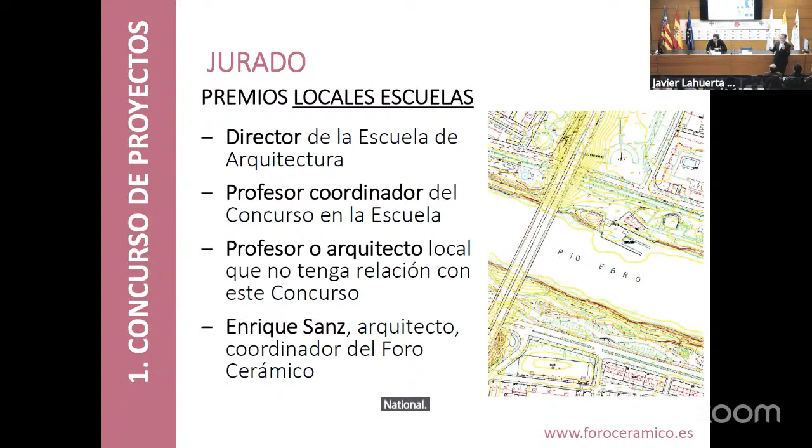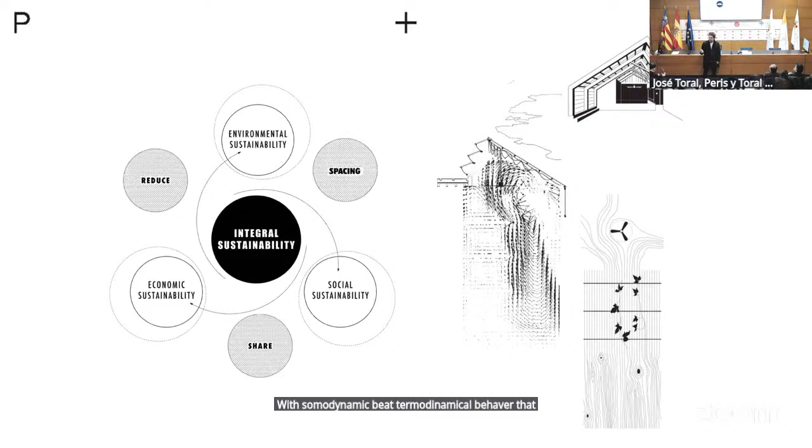So what we do in the office is, instead of aiming directly at the environmental, only at the social or only at the economic, we try to do strategies that are somehow in between. Whenever we want to be environmental and social at the same time, we use the strategy of spacing. We create some intermediate spaces with a thermodynamical behavior that helps reduce the energy demand of the building, but at the same time we place them in the circulation parts of the building, in the shaded parts of the housing, in order to have some social benefit.

And whenever we want to be environmental and economic, the strategy we use is reducing. From the 3 R's, the first R is reduce. That means we have to be able to do the same with the least amount of material necessary. So we reduce the number of layers, we reduce the amount of materials. Remember the Norman Foster documentary, how much does your building weigh, that Mr. Fuller was asking him? Because the less something weighs, the less it contaminates. So we try in every sense to simplify all the solutions in order to reduce them as much as possible. By doing this, it's much more environmentally sustainable, but also much more economic.

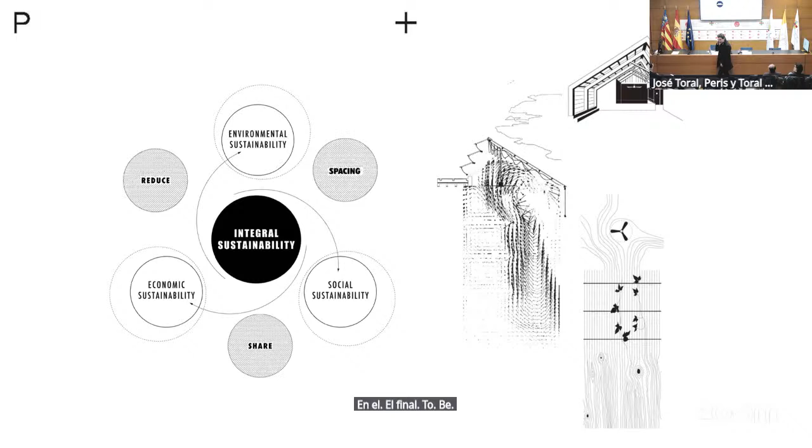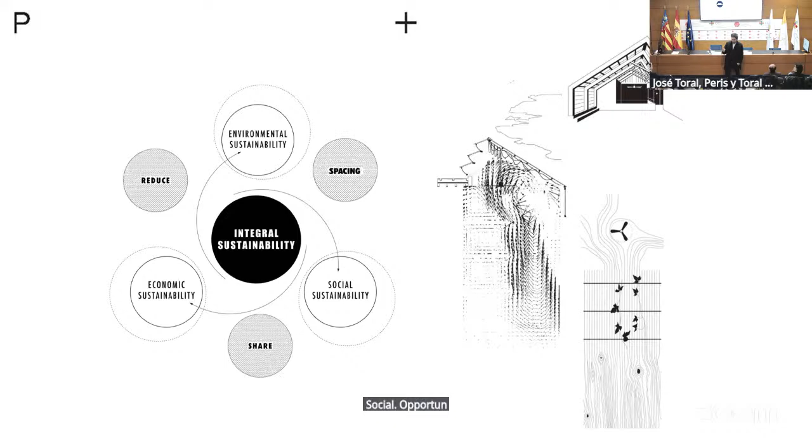And finally, whenever we want to be economic and social, the strategy we use is the idea of sharing. Every time we share, we don't need to repeat the solution, so we only need to do it once, and everybody is able to take advantage. So it's more economic, but at the same time we give a social opportunity. So we will talk about our projects, but the important thing I want you to understand are the strategies; the project is only a way to understand the strategies.

So we will begin with this project. All of the projects are social housing. They all go through competitions. And we took the projects that we are doing in the office with some kinds of bricks. So this is a building we did in Ibiza. This is Ibiza, the downtown is over there on the left. But we're here in Playa d'en Bossa.

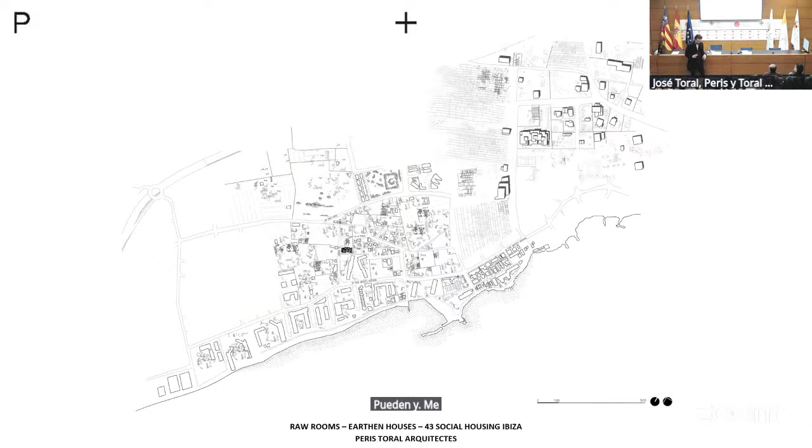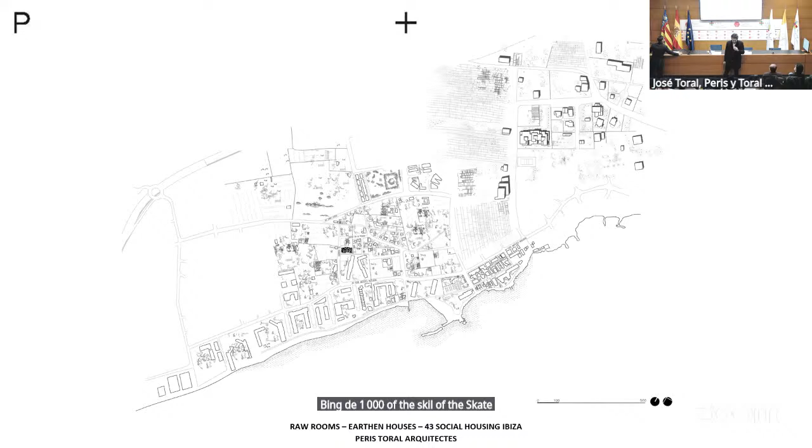It's an area where we have many big-scale hotels. It's also very close to the airport, which means the planes go very close to the hotels. It's very noisy, and that's why they have become discotheques, like Ushuaia, some of them very famous, because they make noise to compensate for the noise of the planes. And we are placed just behind there, in the middle of small housing. So we wanted to be in the middle, using the scale of the single homes and at the same time getting the scale of the big buildings.

And by doing this, also facing all the dwellings to the south, and also taking advantage of facing the embat, the wind that is coming from the sea to the inland.

And this is a diagram that we did in the competition, but we like to show this diagram because we don't see an object, we see a process. No, we understand the system, so we're talking about a system. We don't see the limits of the drawing because we are talking about a concept, not about an object. So we don't design an object, we design a concept that is related to this idea of the raw rooms.

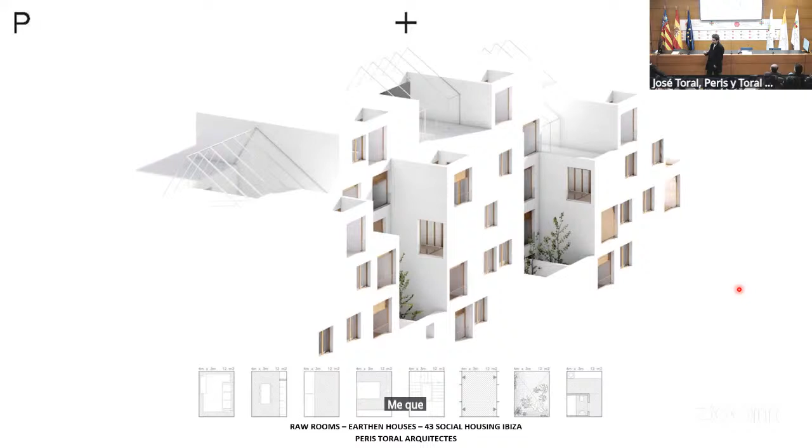So in some way, we understand that in the 21st century, it is important that we don't have the hegemony of the living room anymore, because the television is not anymore the center of the house. Because the relation with the media is more an individual relation with our devices, and privacy is more the relation with our device than our individual room. And that's why, in some way, we have decided that maybe a solution is making bigger rooms and making buildings with equal rooms. So this is a 3x4 room. This is the model we're using.

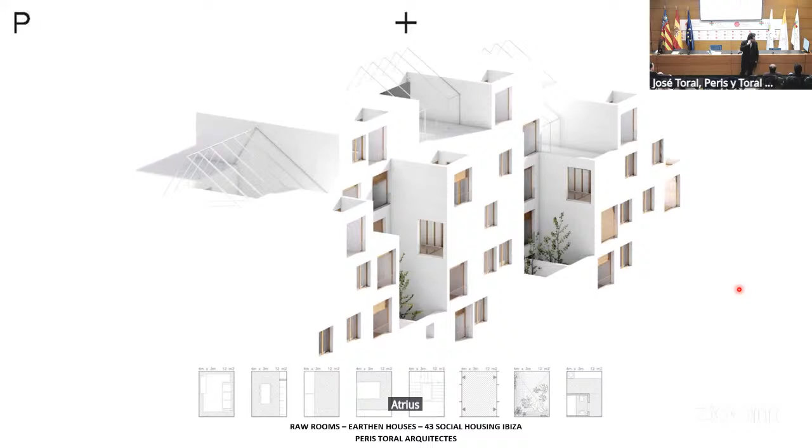And the strategy here is, because of the regulation also, we needed to have some step backs when we are going up, for some very boring regulations. So we take these measurements, and what we do is shape the volume in order to generate more vertices. And every time you do a vertex, that generates a vortex and increases the movement of the air. And also you can see that we are covering the patios with some atriums that will have some environmental behavior.

And this is the plan, so we have 3 cores. Every core has a stair, then the lift, and then we have a room, and then the patio. So we repeat this 3 times. We're able to enter up to 4 dwellings per plan, all of them with cross ventilation, because they're facing two facades, or because they have the cross ventilation through the patio. So we work with this idea of the equal rooms houses with no corridors.

When we go closer, you can understand some ideas, some structural ideas, some bearing walls. Here we understand this relation of the stair, the lift, this room is the same that we see here. Then we have a lattice, a ceramic lattice that gives some privacy to the windows of the inner dwelling. So in some way lattices, privacy, and the movement of the air are going to be very important in this project.

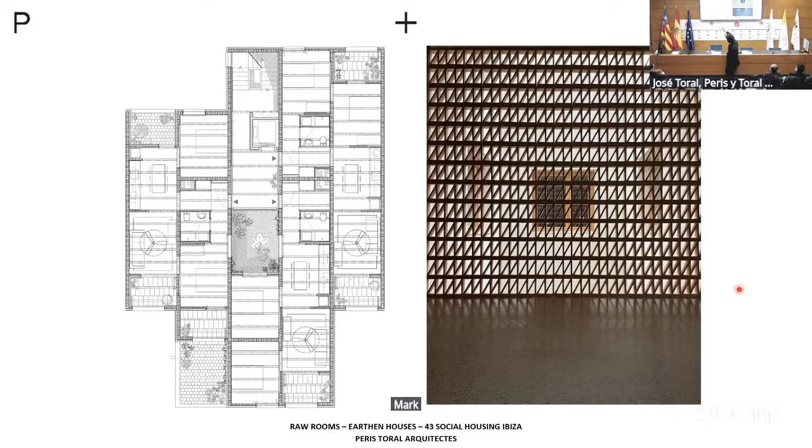And here you can understand also that the relation that we have to the exterior is through these intermediate spaces that, when they are facing south, are closed with glass curtains and work as winter gardens. And the ones that we have in the north are acting as a thermal buffer. So the relation of the interior to the exterior will be through intermediate spaces. So we can see here all this materiality and all this idea of the enfilades of rooms.

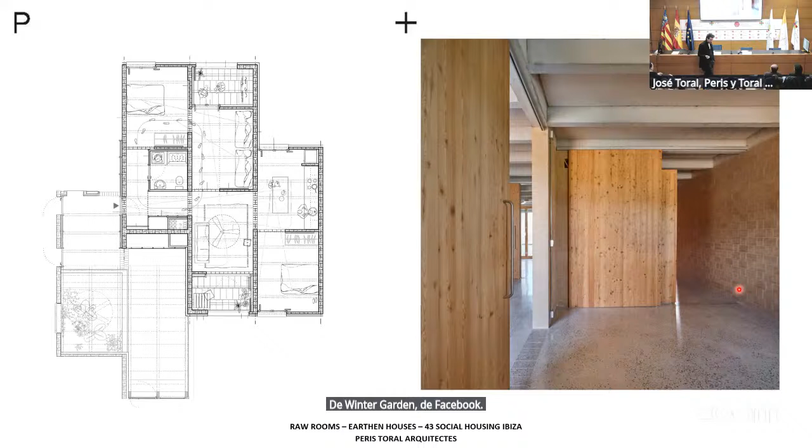And if we go closer to one of the units, we can see here this unit that we're talking about: 6 modules, and 2 half modules that are the relation between the thermal buffer and the winter garden. The first one is the entry. The entry is the one with water. So we have the bathroom, we have the washing machine, and we understand it as furniture. So we understand all of this as furniture inside a room. So that's why it's a lower level.

Then it is important that the bedrooms have 2 doors in order to have a double circulation, so we can decide how to move through the house, and we can have some relation of the inner space from one to another. And also from the living room, we have all these diagonal relations between the kitchen, the living room and the bedroom, and again it's a house with no corridor, so all the surface of the corridor is put into the bedrooms, to make all spaces equal. And also this relation with the winter garden. This is the winter garden in the summer situation.

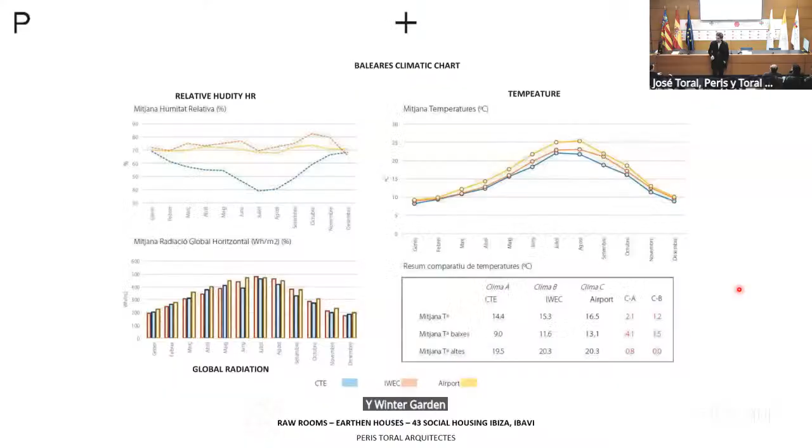But the real site plan will be this climatic chart. So to understand it, these are the mean temperatures. In winter, it's 10 degrees, so that means that we go from 5 to 15. Then in summer, the mean is 25, so we go from 20 to 30, more or less. And another thing is the relative humidity.

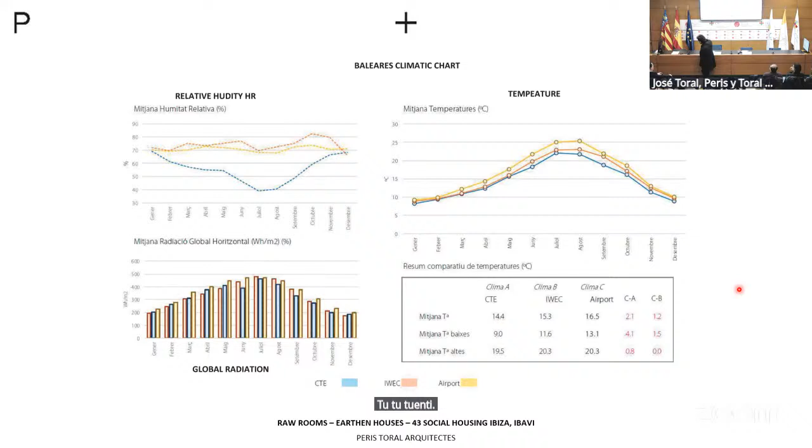If you see here, the blue one is the one that the regulation says, but it's not proper. The one that we take from the airport or other databases shows a very high relative humidity. We should understand that relative humidity should be between 50 and 60%. So if we are around 80%, that means it is too high, and bacteria increase. And if it's under 30%, then all of the defenses get very weak.

So in order to face this climatic curve, one of the big deals that we had in this project, because it's also housing and we were worried about energy poverty, people that cannot pay for the energy, was to try to solve the building with no system. So we wanted to solve it without the need for any active system.

So what we do is try to understand where comfort is coming from. Everybody understands that maybe comfort has to do with temperature, but temperature is not the only parameter that we have. We also have the relative humidity, the movement of the air, the inertia, and the user: the behavior of the user, the activities they're doing, the clothing they're wearing. All of these parameters are affecting the comfort. It's not only temperature.

We also like to make this drawing. This drawing is called the psychrometric abacus. It's an invention of Carrier, but Carrier not only invented this, he also invented the air conditioning. He told us that every time we are outside the green area, we have to put on his machine. But that's what we don't want to do. We are going to try to translate all these comfort parameters into architectural elements.

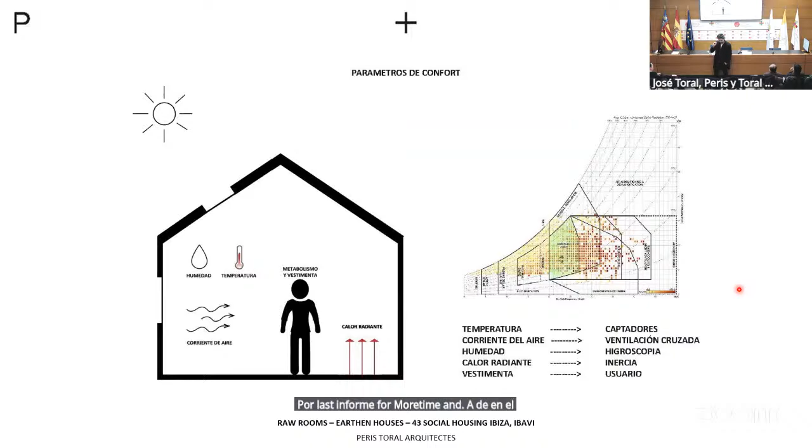This shows the ideal situation of humidity, and that's why one of the first decisions was making this comparison: what if we use concrete, brick, timber, or earth. The best one in inertia, that is density and conductivity, would be concrete, with a density of 2,300. Then we have earth and bricks, very similar, one with a density of 2,000, the other 1,800. And timber is not that good with inertia.

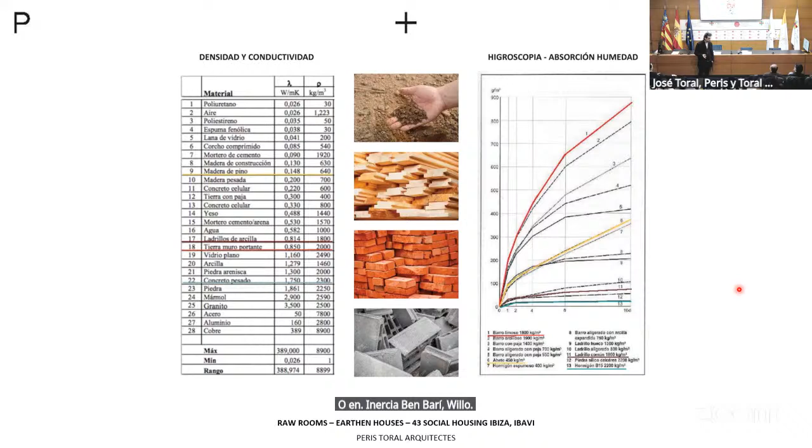But if we look at the capacity of moisture regulation, the hygroscopicity, it works the other way around. The worst one is concrete, then we have brick. Timber works very well, but earth is able to work 2.5 times better than timber, which was already working very well. That's why we decided to use these bricks made of earth. So there's no firing here, because we want this regulation.

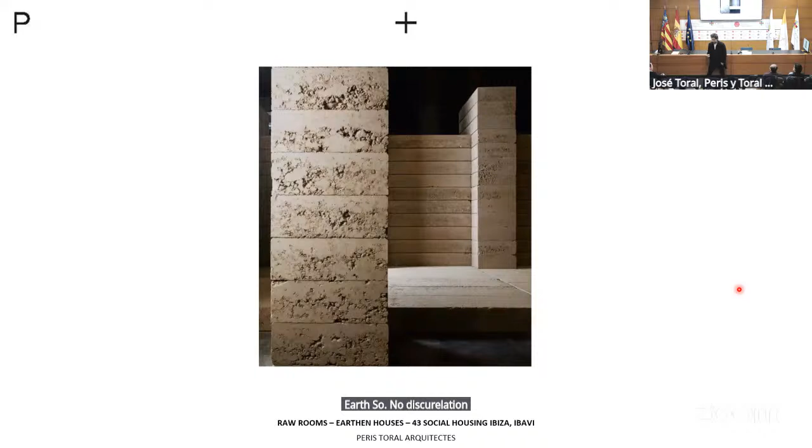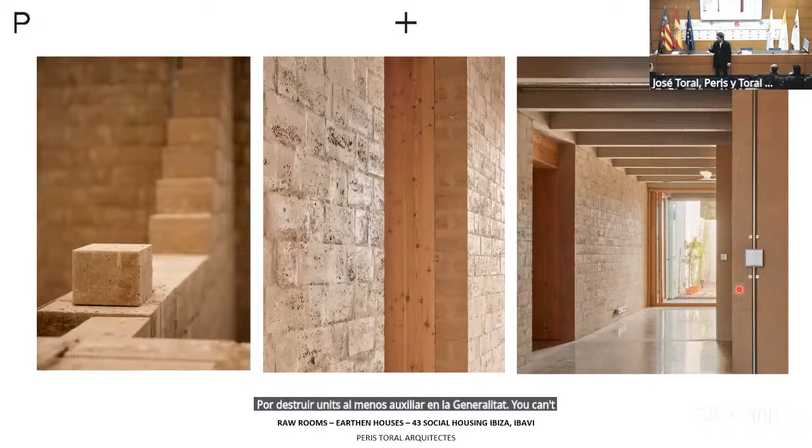The manufacturer used to make very big pieces. They are very beautiful, but very difficult to put on site, so we need auxiliary elements. We wanted to do 43 units, so it was too many, and we didn't have the opportunity to bring all the auxiliary machinery necessary to build it like this. So we asked them to go to a smaller piece that you can handle with one hand. In some way we're looking for this relation between the user, the construction, and the aesthetics.

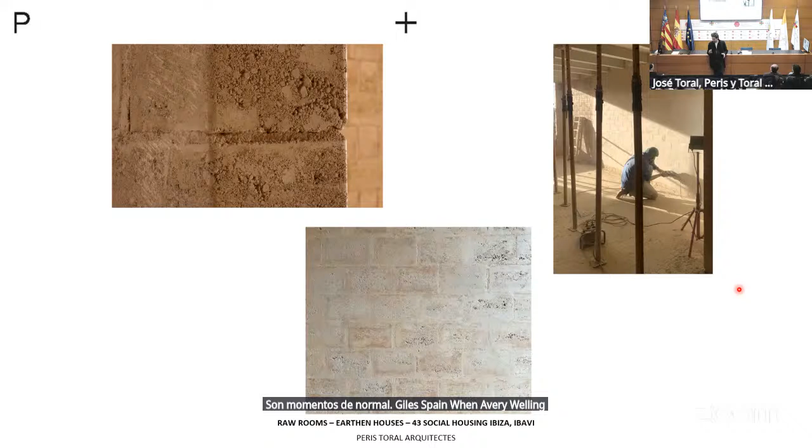We put many people raising all these labyrinths of earth walls that we can see here, so at some moments it looks like a cave. There's an issue here in Spain with how we do constructions: normally when you build walls, we plaster them to ensure we don't have acoustic breaches, because the joints are not perfectly built. So when we plaster, we cover all the joints. But here we wanted to take advantage of having the material, so if we plaster it, we lose that.

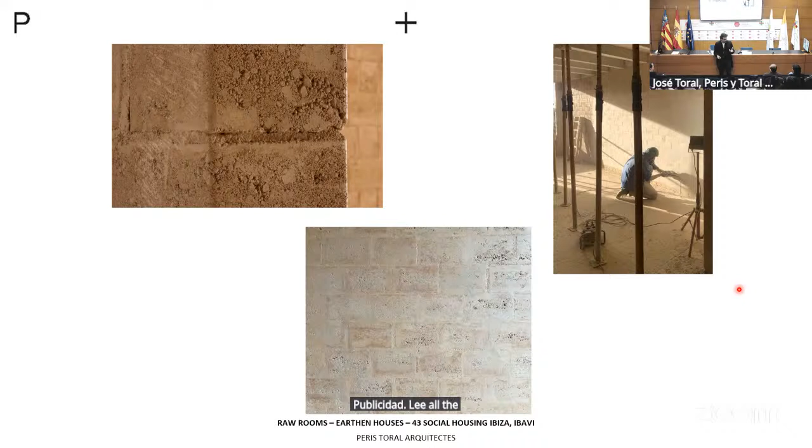So instead of doing this, what we did, okay, we made a very fine plaster that we polished in order to make sure that all the plaster was closing perfectly all the joints. So in some way, this idea of reduction, that we are taking out some material to do a finish. It's not always thinking of putting more material. Sometimes it has to do with taking out some of the material.

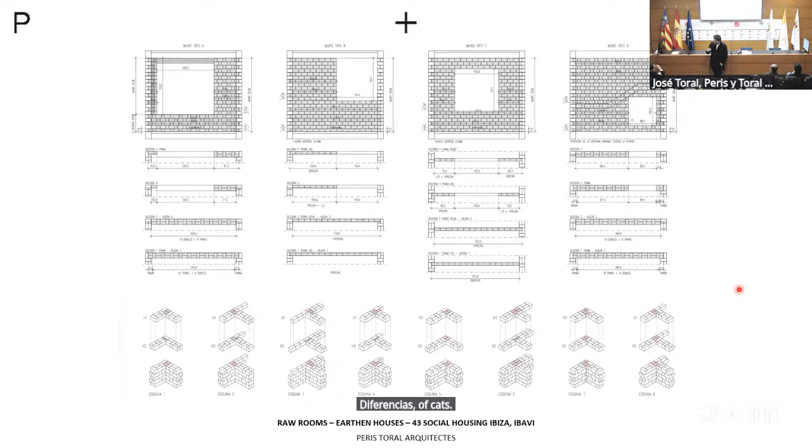And that's why when you see all the walls are very shiny. It's the same what we did in the pavement. The pavement, instead of adding a finish, we just polished all the floating layer. And this is all the work that we did. Every time we cut a piece, we mark it in a red color, so we have different sizes of cuts. That's all to make sure that all the walls are built the way they should. And all these kinds of very boring plans.

The one issue here is that every time we do a building with bearing walls, we try to solve acoustics with the law of mass. The acoustics between neighbors can be done with a mass-spring solution. That's how very light construction systems work. But the other way is making a very heavy solution that we can solve with only one layer. So you can solve it with many layers, but then you need to put some isolation layer, or you put only one layer with a lot of mass.

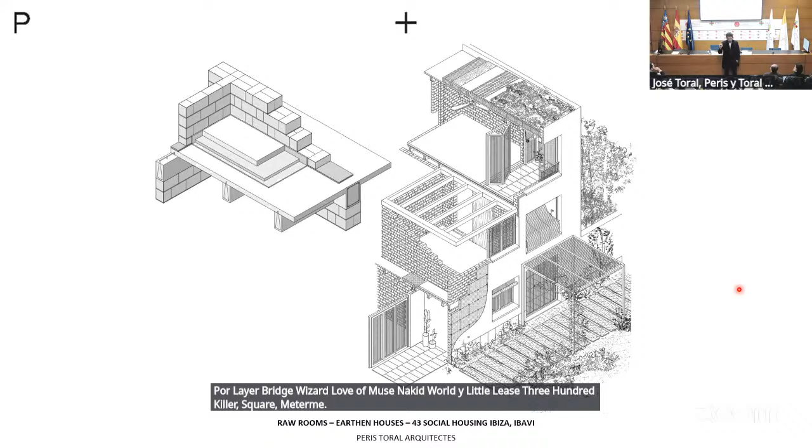So in order to make it work, you need at least 300 kilos per square meter. We have this 2,000 kilos per cubic meter piece of earth. By 20 centimeters, we have 400. So we are able to solve it with only one sheet, so we don't need to repeat the structural layer in order to solve all the acoustics. But then all the rest of the walls are only 10 centimeters, just trying to adjust the dimensions to the minimum necessary.

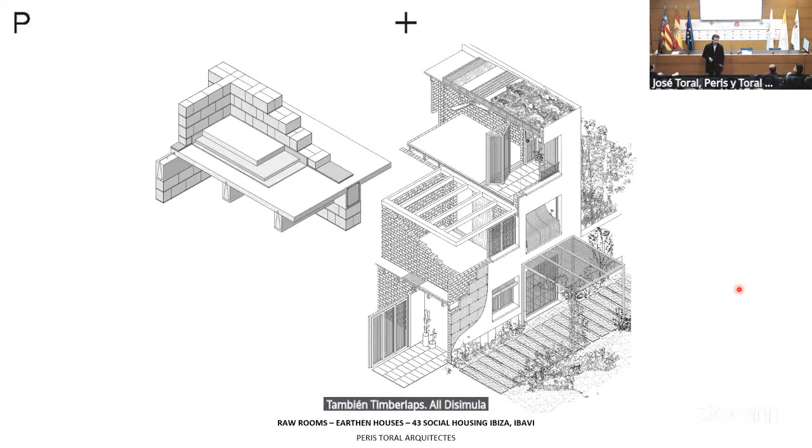And then one of the big issues here was the slab. We did the competition with timber slabs, but through all the simulations we did with our consultants, they told us we need to increase inertia. As we were talking before, concrete was the best material for inertia, so we said, okay, now we have to go to concrete. But we were worried about the emissions. So we thought, let's try to think how a concrete slab should be to reduce the amount of concrete we are using.

It's something that has happened through the years: we have been losing geometry in architecture because geometry meant we needed more hand labor. The whole 20th century is a transformation of constructive solutions into more simplified solutions with no geometry, and slabs began as very geometrical ones and became these losas, the slabs that are totally horizontal. But they use more concrete.

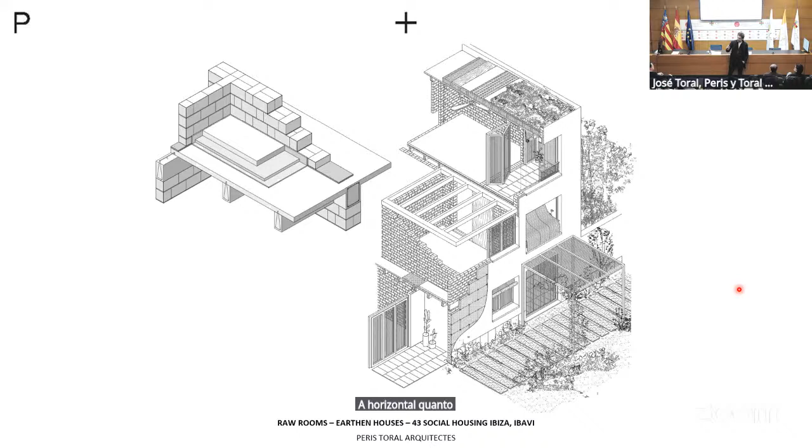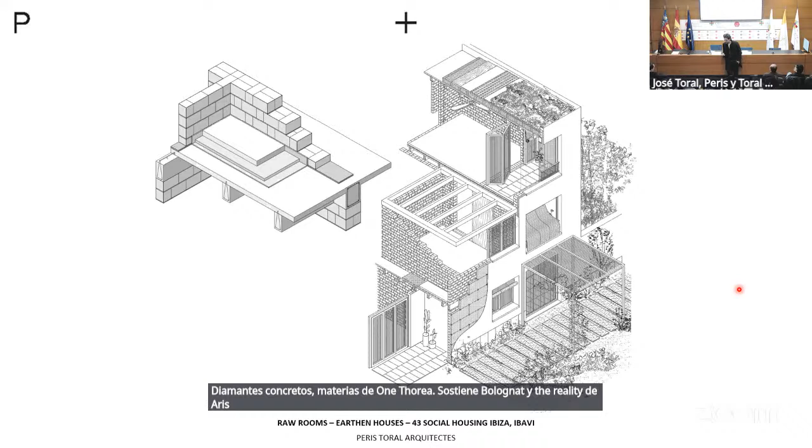In this case, we put a prefabricated beam of 10 by 20 centimeters every 80 centimeters. Everything is joined together to compensate moments, making it one layer with a 5 centimeter compression layer. That means we have 20 plus 5, 25 centimeters of structural section, but the equivalent concrete of a 10 centimeter slab. That's a 66% reduction in the amount of concrete. Sometimes we think it's the materials that are sustainable or not, but in reality it's the way we use the materials that makes them sustainable or not.

But now our slab is very light. We cannot use the law of mass to solve the acoustics, so we have to go to a mass-spring solution. That's why we put 30 millimeters of rock wool on top; that's the spring. The first 5 centimeter compression layer is the first mass. Then we have the rock wool, and then we add 6 centimeters of floating concrete layer that, instead of adding a pavement, we decided to polish in order to take advantage of all the inertia we are putting there.

This is how we built it. Prefabrication is a way to put geometry back into architecture. And it is nice to see that what we wanted was inertia, which has to do with the surface of interchange. By doing this geometrical slab, we are able to increase the surface of interchange by 1.5.

So we have more surface to dissipate the energy. So it's working like a radiator the other way around. And for doing all the insulations, all the coverings, we decided to use Posidonia. Posidonia is a sea plant that we have in the islands. And so we dry it, and we are using it to do the coverings.

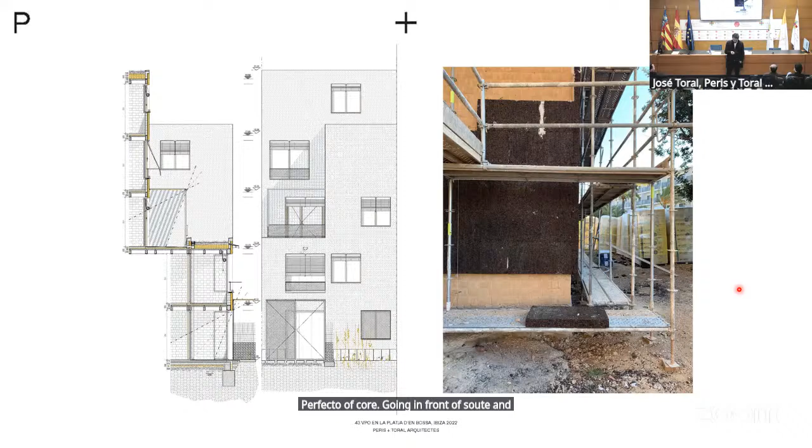recycled concrete section. Then we insulated everything with cork, 10 centimeters of cork, going in front, so it's an ETICS, an external insulation solution. So at some moment the building was totally brown. Then we plastered it with lime. So the lime has the capacity, by going back to stone, to absorb the CO2 of the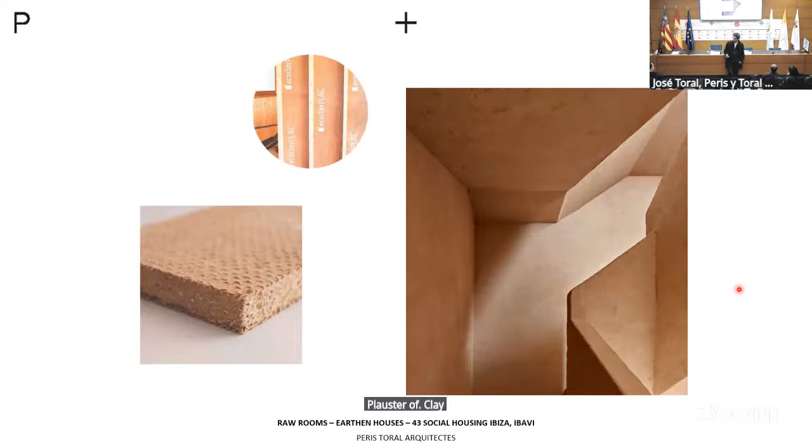manufacturing. Then in some of the inner insulations, instead of using plasterboards, we are using clay boards. And we plastered them with a clay plaster with some straw. So that's why we see this straw that gives unity to this space.

And the external spaces: instead of using concrete, we're using gravels, and instead of joining them together with mortar... again, you should understand that everything that joins materials has very elevated emissions. So we try to solve the joining of materials with gabions, putting the gravel directly onto the floor. That makes a very sustainable solution. So we're not using anything that is a gluing material.

So that's how we were able, even using concrete, to have a reduction of 60% in the quantity of emissions of the building. And here we can talk about these thermodynamical elements, the winter garden and the atrium. This atrium is not only covering the patio, it's bigger in order to increase the surface of captured energy, but mainly to generate this social space, so at the end of the social plan, we have this room for the community, to become this thermodynamical and social strategy.

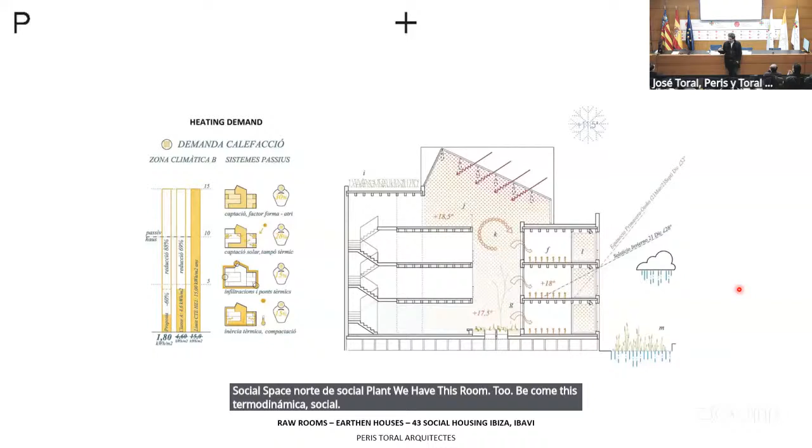So this is working as capturing energy in the winter. We capture energy with the atrium, we capture energy with the winter gardens. And then as we have a lot of inertia, these 5 or 6 hours that we can capture energy in winter, we can keep this energy for the rest of the day. And because we have a lot of insulation, this cork insulation with no thermal bridges, we can keep this energy and we are not going to lose it. And this is how the atrium is working.

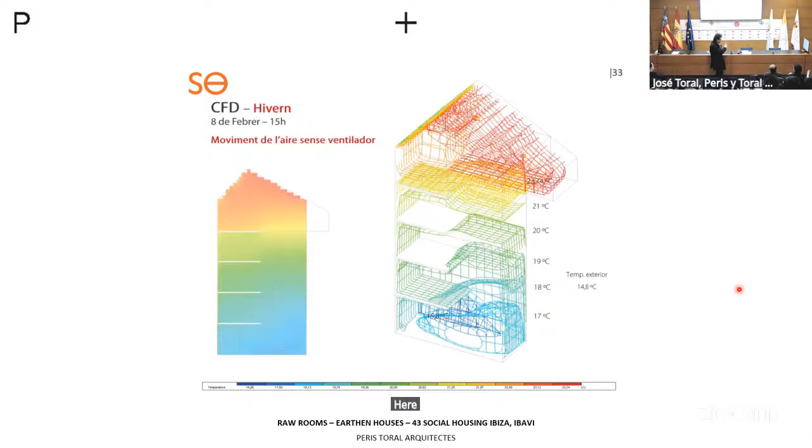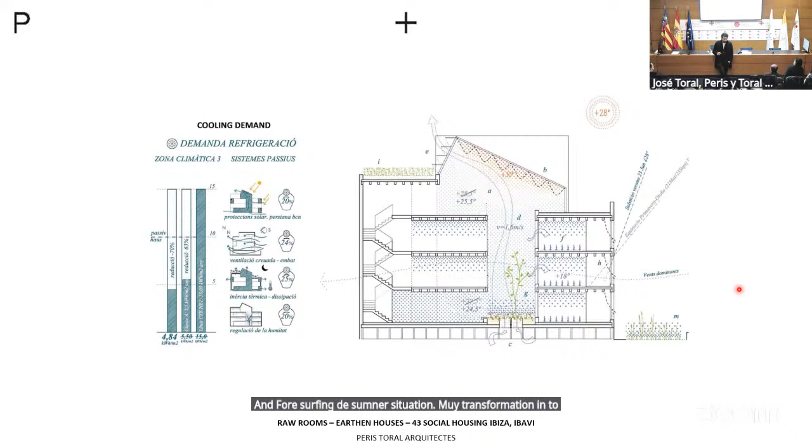the use of energy. And for solving the summer situation, we transform the atrium into a solar chimney. That means that we put a solar protection in the inner part. We make openings in the atrium, on the two sides of the atrium, also in the ground floor. And then the solar protection makes a chamber that increases the temperature, and hot air goes up, and that generates a movement of the air. So that's what's happening. We are generating some movement of the air because of this solar chimney.

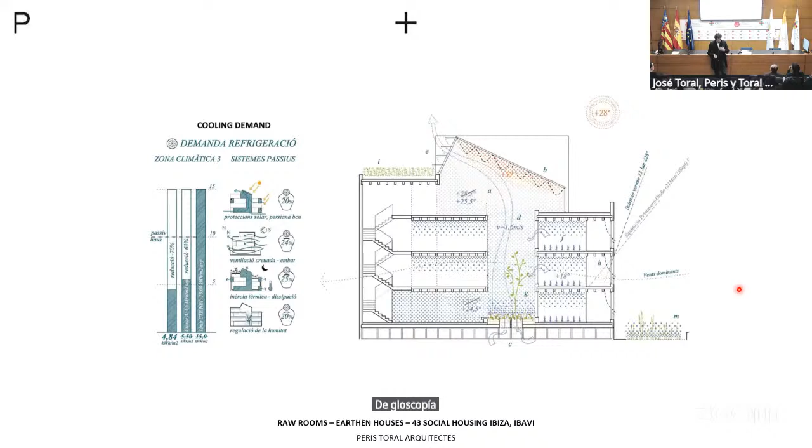And also, as we open all the building, all the shape of the building is changing. We can dissipate more energy through all the building. And also because we have the earth, we can make this moisture regulation, the hygroscopicity, and also the inertia, and we can cool at night the building. So that's why when you see some images, it's full of lattices, because it is very important, this movement of the air of this solar chimney.

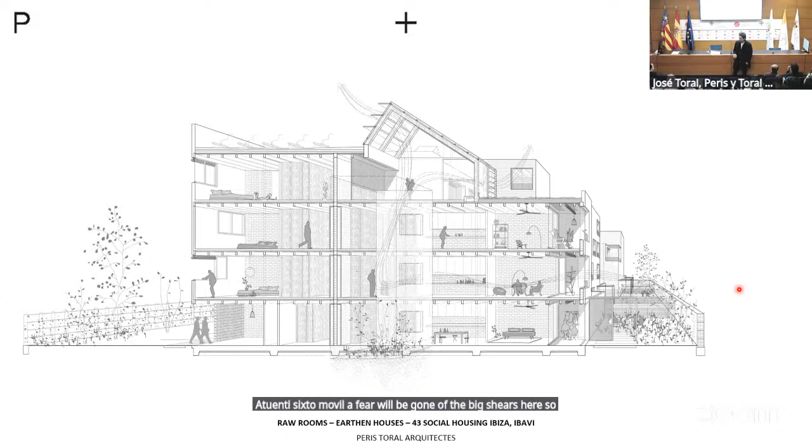So movement of the air will be one of the big issues here. So that's why we're doing this with this solar chimney. We are working with these solar protections that allow this cross ventilation in all the units. So this is the solar chimney. You see the solar protection. We are also using the fan in the other way around to move more the air. And that's what's happening. So we are able to generate a 2.1 meters per second movement of the air, even though outside there is no movement of the air.

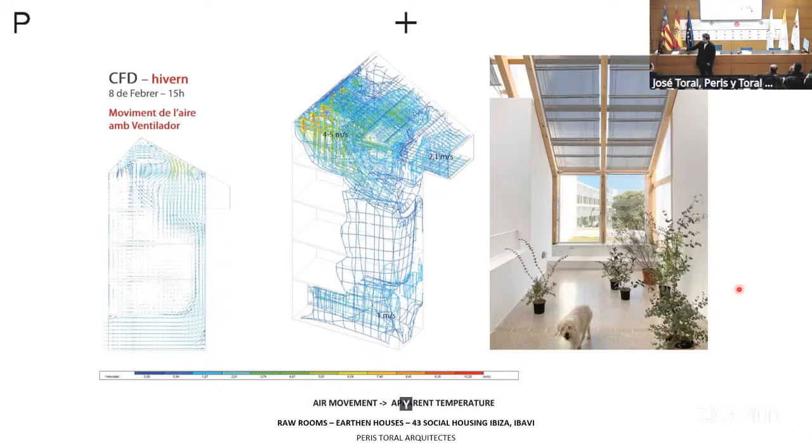So that means that every half meter per second, we have 1 degree of thermal feeling less. So that means that with 2 meters per second, we feel 4 degrees less. The temperature of the thermometer stays the same, but your feeling is 4 degrees less. That's the final situation. This is like how to validate our system. That's the same way they use for mechanic systems. So it's a validation of the percentage of people in discomfort.

In this case, it's 6%. So that means that we have 94% of people that are happy with the situation, and this is the worst day of the year, the worst hour. That means that with a temperature of 27, remember that the inner temperature should have been between 26 and 27, a movement of the air of 1.5, the solar chimney was able to do 2.1 meters per second, with a humidity of 56% because we are using the earth, and the proper clothing level of the user, we are able to move this green area of Carrier into a situation of comfort even with high temperatures.

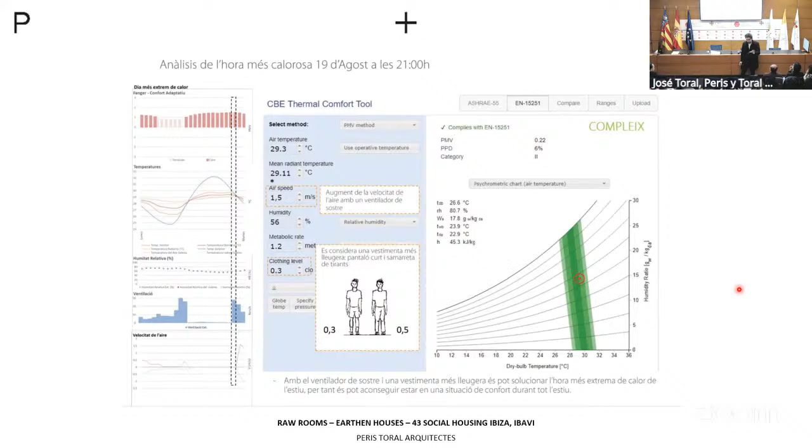Then we like to go back to the building once it's totally inhabited, and we like to understand how people are taking advantage of this relation of the house with the atrium, opening their windows, how they appropriate the space, all this relation with the earth, their furniture with earth walls, and these outer terraces, the winter gardens, how they inhabited all these spaces, and going back to this idea of the comfort, that the dog is able to understand, to find a place.

So going back to Barcelona, this is another project we did in Barcelona, and this project, it is very important. It is this block here, but the important thing is the relation of the block with the river. This is the Besòs River. So Barcelona is between two rivers, Llobregat and Besòs. So we are very close to this river, and the first thing is understanding what's the territorial importance of this river for the housing. It is a canal of wind that goes from the sea to the mountain.

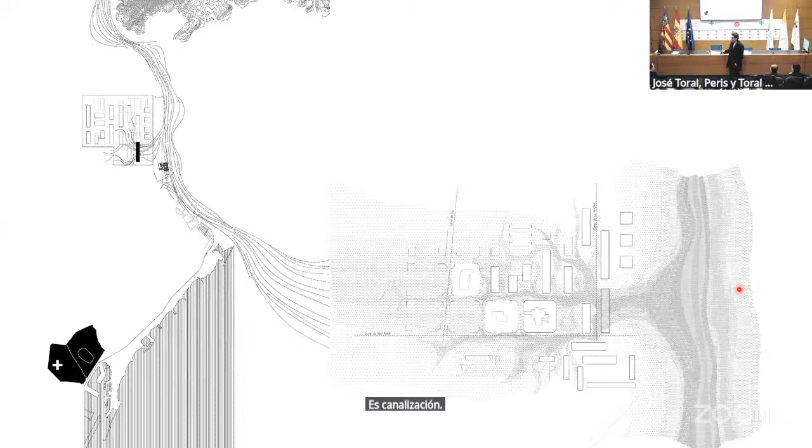So every day, during the day, the wind is going through the river up to the mountain, and during the night, it's going from the mountain to the river, to the sea. So it is this canalization of air that generates this Venturi effect that we wanted to take advantage of with our design. So that's why we decided to do all the facade with lattice. We are facing this wind channel, so we wanted to absorb the wind of this canal.

And we were not the first ones who realized that this was happening over there. This is a building of Bohigas, pretty close to our building. He also decided to have all the facade with lattice. In his case, it's a facade of the entries. In our case, it's a facade of the terraces. But both buildings have the same relation to the river with this idea of the lattice. So this is how he's entering.

And this is the situation: our building is to replace this housing, so people who used to live here go to the new houses. We were not very happy with that because we thought that they should have maintained these kinds of houses, but at the end, they only keep two of them as a museum, and the rest they put them down.

We were very interested in this idea of people living outside their homes, and standing. So in some way, even though it was a competition where everything was totally decided, that we have to do 2 dwellings per floor, so we couldn't do a corridor or these kinds of things that Bohigas was doing, we thought that maybe we can try to increase the amount of intermediate spaces. And this is our building in relation to the building of Bohigas. And this is our facade.

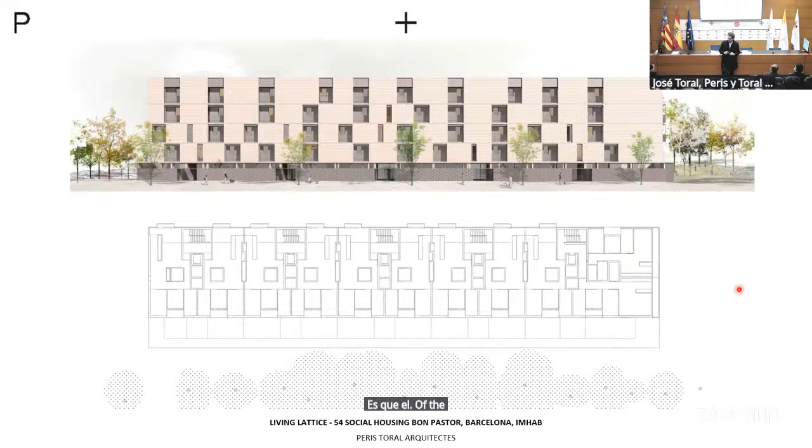We're always worried about this relation of scale. Now, how it's built. Here we understand. So we have some movement and then some individual openings appear, which we are really happy about, because we think also for the climatic relation that we have in our climate with the exterior, it's always better to look to the exterior through some intermediate space. Also, we can understand the ground floor. We have some lattice because we are also thinking of this movement of the air, taking advantage for the basement, for the parking areas. This is one of these spaces from the inside.

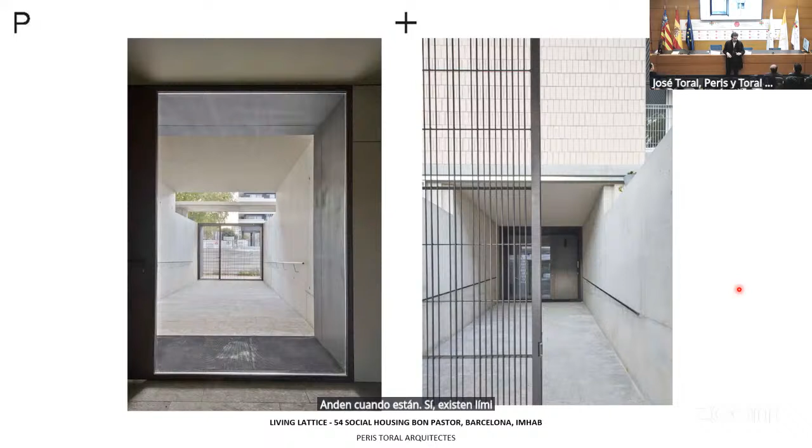It helps us to have this relation between the rooms, bedrooms, and all this renaturalization. This is the entry. Try to generate this intermediate space. In this case, we designed one brick that was narrower so that you cannot put the feet inside and you cannot climb. So it is a special design that we did for this project. And then with this intermediate space, we can raise up the ground floor 60 centimeters in order to give some privacy to the houses on the ground floor. So this is the entry, and these are the houses on the ground floor.

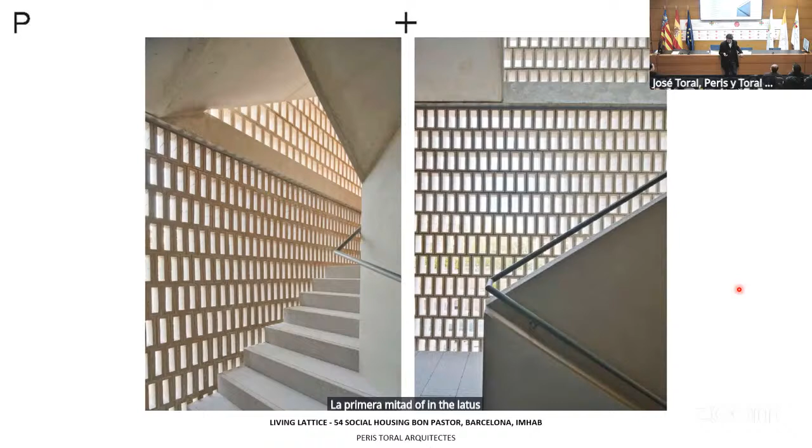They also have a relation with the patio that is behind, this ventilation that we have, and also these openings. All the windows enter into the wall, and we have this in and outside relation. And the stair, also understanding this dynamical behavior of having the lattice and the movement of the air over here. So it's all about this movement of the air that we were talking about.

So in some way, one of the not very evident decisions is the stair. Normally, you try not to use too much facade when you put in a stair, but in this case, we put it in a way that it's using the most facade. We did that because then we can put down the lift and put the second bathroom behind the lift in order to liberate this space and have this diagonal relation and have more depth and allow the air to go better from one side. So now we have this from the living room to the living room, having all this relation.

And one thing that we were very surprised by, this is again the building of Bohigas. It's a complex, and we were totally fascinated by how, in that moment, with the bearing wall building, they understood the aesthetics of construction, and how beautiful this aesthetic of construction is. So as they are doing bearing walls, they needed to put the slab. Now the easy way to do a bearing wall with the slabs is showing the slab. It's a cheaper way. Now we cannot do it because then we have some thermal bridges.

But how they can give rigidity to the facade by entering some of the bricks on the outside, and how everything is going from floor to ceiling, and it's very simple construction. We're totally fascinated by that, and we thought, okay, maybe the neighborhood is changing. This is the only relation we have. Let's try to do nowadays the same Bohigas did in his moment.

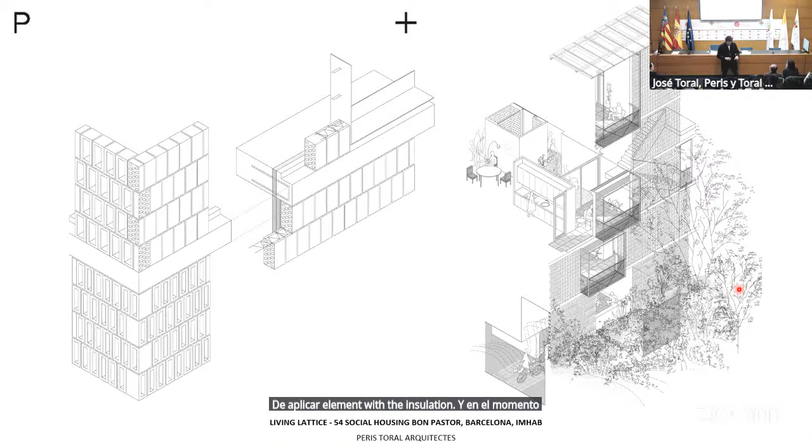So in some way, the cheaper way to solve it is showing the slabs, but now we have to solve this thermal bridge, no? So what we did is to put a precast element with the insulation at the moment we were doing the slab. So we don't have screws; we just put the prefabricated piece that is connected with the inside concrete.

Okay, so now we have this insulation, and then we are using the brick. Normally you put the horizontal brick, but we wanted to have the lattice, so we put it. It's a piece of 25 centimeters that is generating this. Every layer has 25. We have this for this metal element, and then we are holding all the facade with a metal element. It's the window that is holding the facade, not the facade that is holding the window.

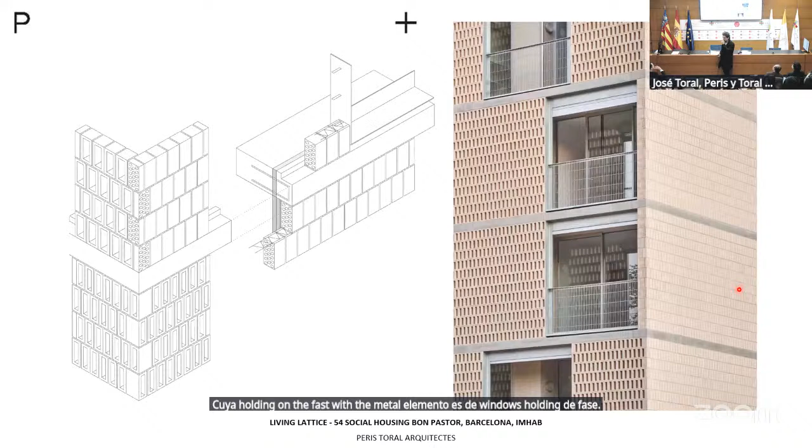And also this corner, understanding that we have to show the construction of the corner. So we do it like this, and again, a very special brick that is double. So it's thicker than standard, in order to show all the holes of the construction. So we're using these three kinds of bricks, the two walls of the lattices, and this brick that is a bit wider, but we manufacture it, we don't cut at all.

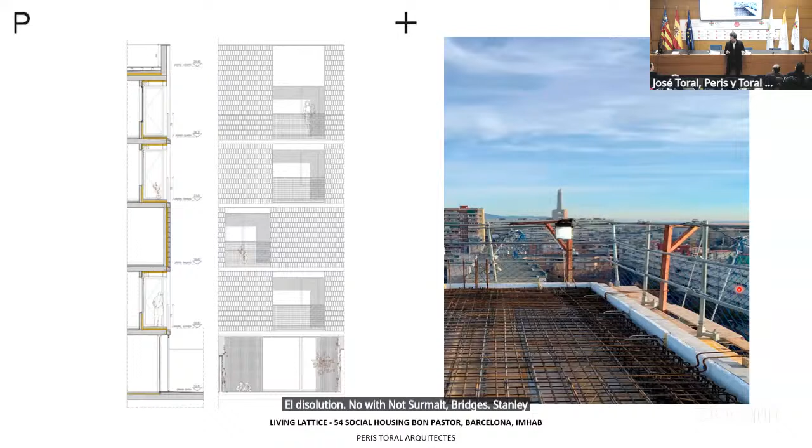Well, this is the whole solution, with no thermal bridges. This is how we build it. We put this precast element with insulation, and then we put the concrete, and everything's joined together. So we don't need a very expensive stainless steel element, because everything is protected with the concrete, the cheap solution.

And then this is what I was saying. So we put first the windows and then the facade. Normally, in a standard situation, the facade is the one that is holding the windows. In this case, the windows are the ones that are holding the facade. Normally when you do a lattice, you need to put some structural elements on one of the sides, outside or inside. But we didn't want to do that. We wanted it to be totally ceramic from both sides.

So these are the structural elements, the ones that are doing the windows. And with the horizontal one in every layer, we're able to hold all the facade. So we see here, these are the elements that are holding the facade with these armors in every layer.

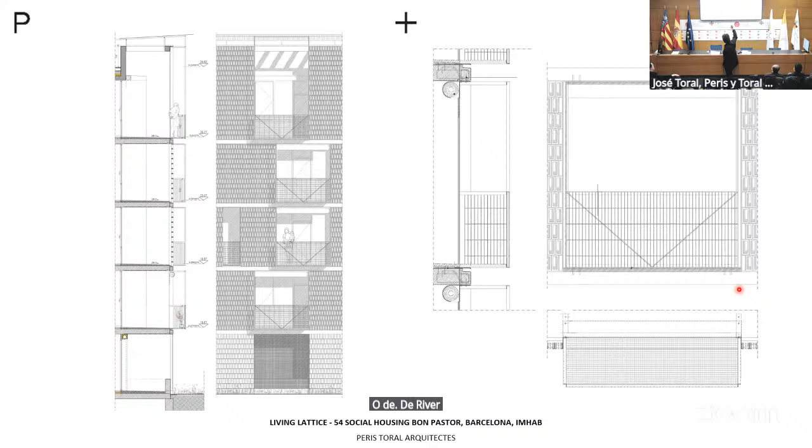And in the facade of the river, it's this balcony that is one element itself. It's totally structural, so it's not the slab that is going out. It's this element. All its elements are structural. In some way we needed to put this V tensor because this point was going a bit lower when we did the structural simulations.

For us it is important to follow. It's not an aesthetic decision for us, but every time I see this element, I like it more because it has to do with the logic of the forces it's working with. It's a piece that we designed very well, totally designed in order to make the rest of the construction just the standard system. So this element has the joints for every layer of the brick, also brings the handrail, also the supports of the slats. It's a piece that we designed to make the rest very standard.

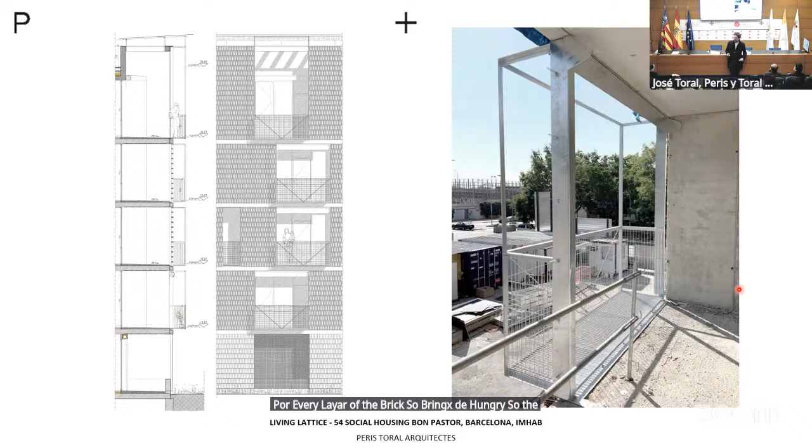That's how it's finished for protection, and that's what I was looking for. When you see the lattice, on each one of the sides, you don't understand where the structure is. And also in the last upper floor, you see that it's perfect on both.

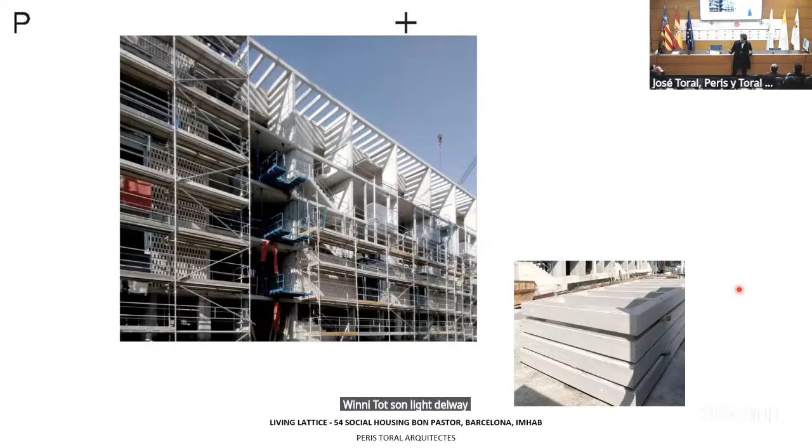And in order to give more transparency, we understood that maybe we needed to put some light behind the lattice. So that's why on the upper floor we put this precast element that allows light to enter, in order to generate more of a light feeling, so that the lattice will become more transparent.

That's the element that we have up here, also with some protection so that the wind and the rain are not entering. And here we see the section, what's happening in the basement, this basement where we will have a parking lot, and we'll try to solve it with natural systems, with natural ventilation. So even though it's totally underground, it has this capacity to take the air.

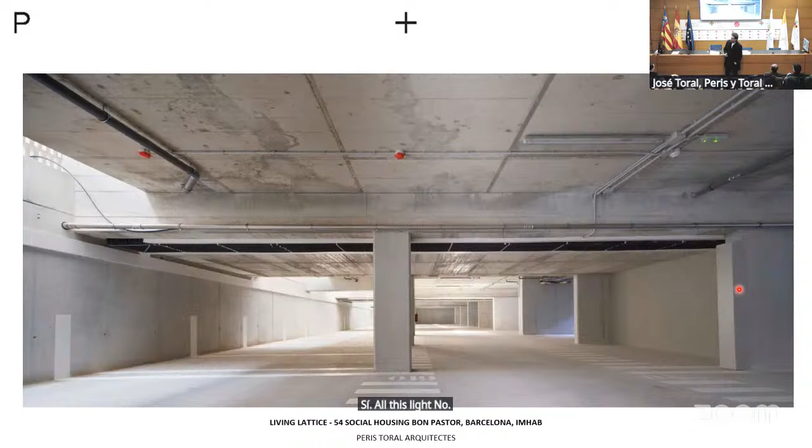So this is the entrance of the parking, and it is interesting to see all this light. It's not only air that is entering; it's also light that is entering here. And here we have a very important reflection, because we do parkings because of the regulation. Regulation is asking us to do a parking, one park for every one of the units. So we have 54.

But we as an office don't believe it makes sense, because the way of mobility is totally changing. New generations are not using as many cars as other generations. We can move through the city in other ways, but mainly because in a few years the automatic car will come into our life, and I can be totally sure that an automatic car will never park under our homes. It will be going around the city. We will call it with an app, and it will pick us up.

So we are building a space that will last more than 100 years, and maybe the use is not going to be there for more than 10 years. So by putting light and air into these spaces, we can give some resilience to these spaces. So this is the plan that the client thought we were doing, but this is the plan that we actually were doing. We thought that in the future you can go through the ramp with your bike, park your bike, and then have some studios, some storage spaces. One of these spaces can end up as a patio with some plants, giving some resilience and rethinking how in the future we could rethink these spaces.

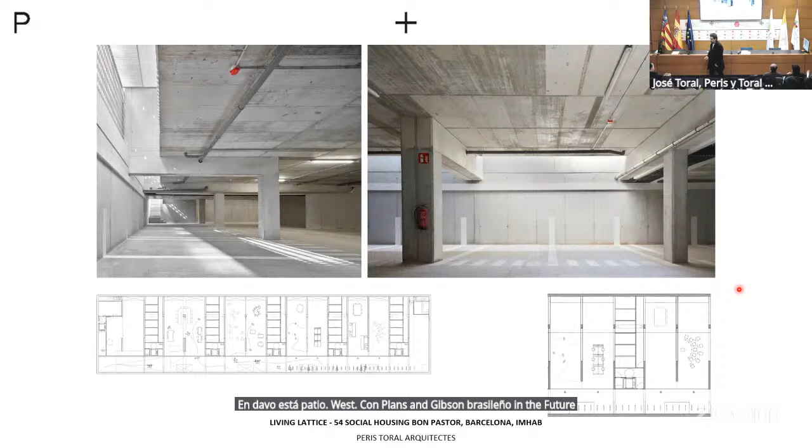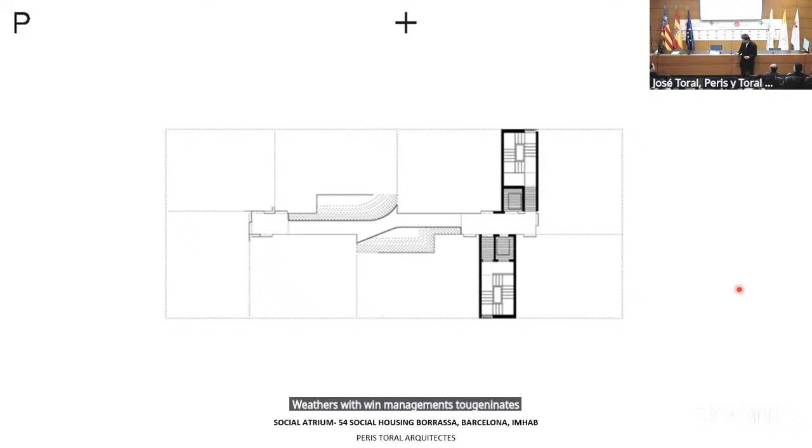Then when we go to the block, these 3 are the same as the tower, so we copy these 3 in this corner. We only needed to change this typology in the middle in order to generate an empty space in the center. Even though this is only 17 meters, we managed to generate some empty space in the center that can become this atrium, this thermodynamic space, this social space that we were talking about, and it has the ability of changing the shape factor during the winter and during the summer, all the simulations that we've already seen. Then we will have all kinds of social places: the parking, the facilities on the ground floor, the atrium, the 5th floor.

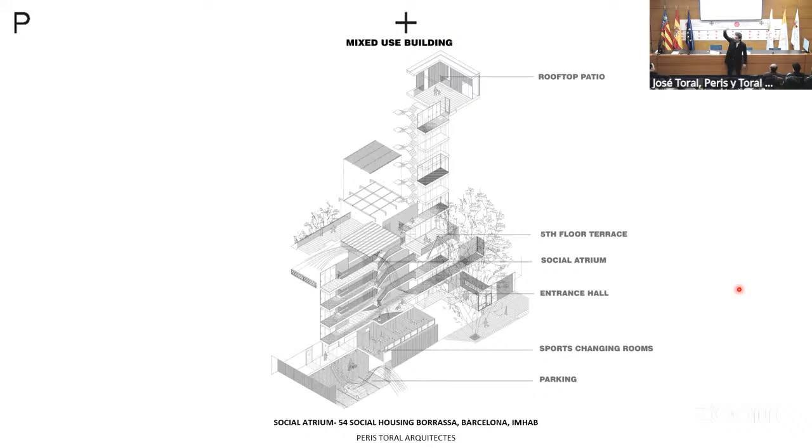When we change from the tower to the block, we have this opportunity of this big terrace, and also the rooftop patio. So this is the entrance. We try to take advantage of all the possibilities of the concrete, of the lattices that we can do with it. This is something that Moragas had done in Barcelona in many of the buildings that he did in the 60s. Also very interesting for us was all the potential of the aesthetics of the brick. Then the atrium, the brick, because of the inertia they have, can give us

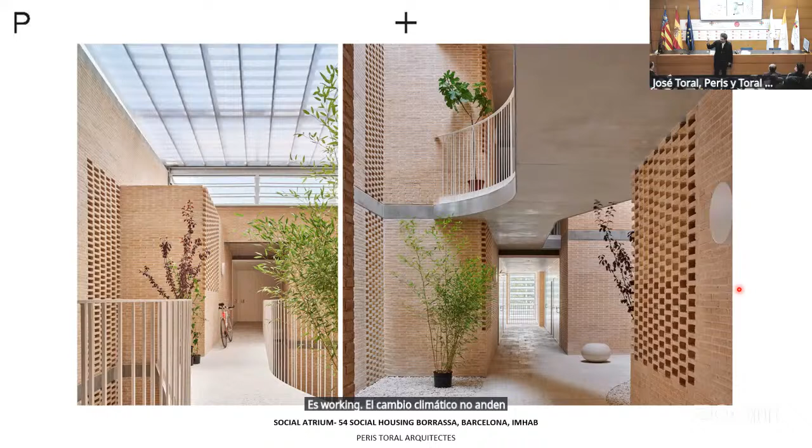Well, using the brick, the mass of the brick can give us this inertia that can help us make this space thermodynamic, bioclimatic, and then we strategically put, when we find an opportunity, some benches, spaces for people to relate, understanding this as a social place at the same time. And all the rest of the materials are also looking to have lots of inertia. Here, the solar protection is a very, very cheap way: we put the solar protection on the outer part, because here we didn't have the maintenance issue that we had in the previous project, and it's calculated so that in winter the light enters, and in summer it totally protects.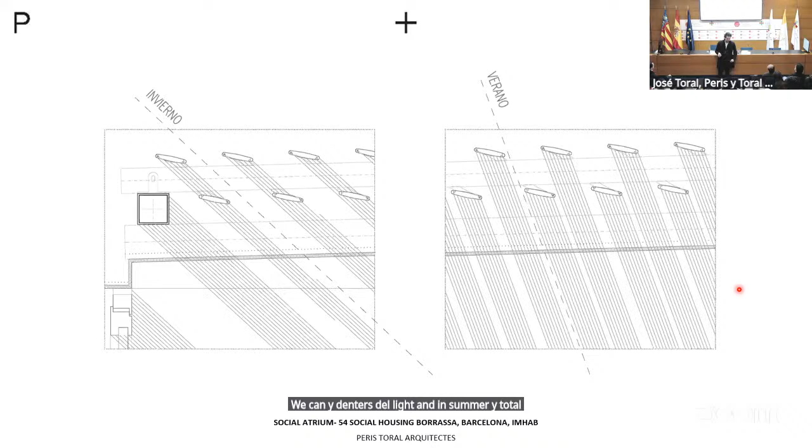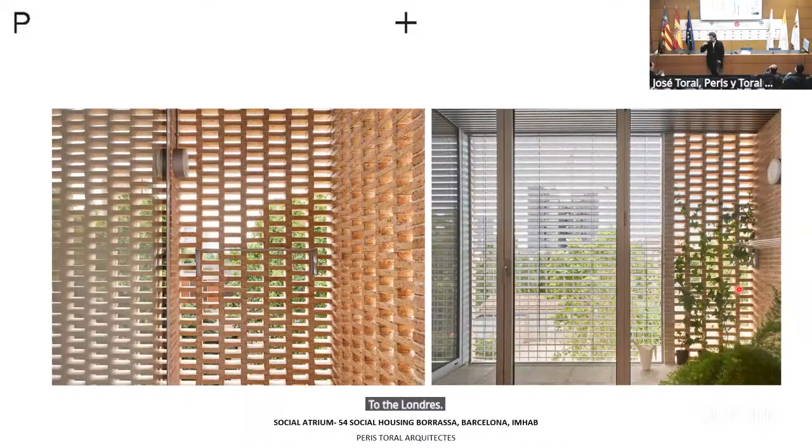We don't need to make any movement in order to have this solar protection. And here we have this social scale, no? This monumentality of scale is very important for us, and the opportunity of the 5th floor, now that we also see it from the outside with this changing of the structure, using the lattices to give some intimacy to the terraces, to the laundry, and also the solar protections that allow the air to go through, you know.

This is all the detail now of how we do all the lattice here. We take advantage of the same system that we did in the previous project, no? But in this case, all with these massive bricks. Also, we have this opportunity of the rooftop that we can also see from the facade by this empty space. And this typology that is important for us, no?

The bathroom is always in the same place. The kitchens are in the party wall, and it can change sometimes, and the rooms are the ones that are able to change in order to not have a totally 10 stories repetition facade. So we are able to have this composition of the facade in order to change the scale of the building.

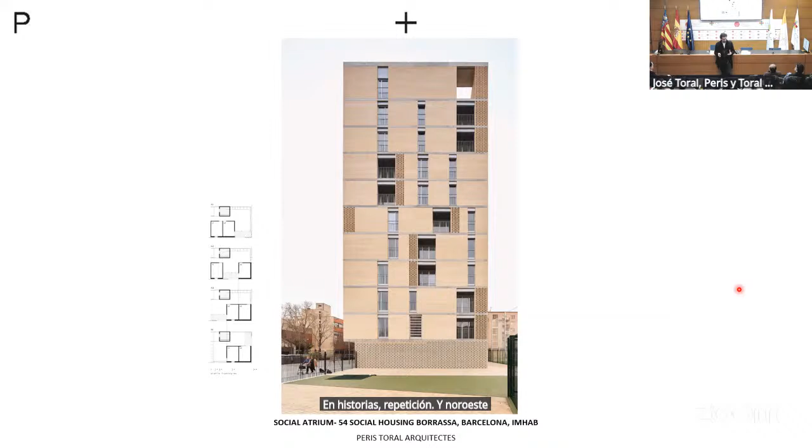So again, here in the ground floor, in the basement, we have this idea of the cross ventilation. This is the facility in the ground floor, and all the ground floor with a lattice, that allows us to do a very similar system as the one we did in the previous project for the parking.

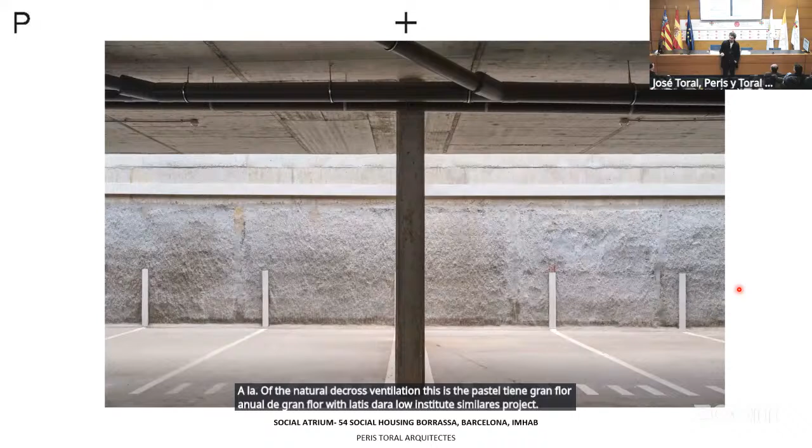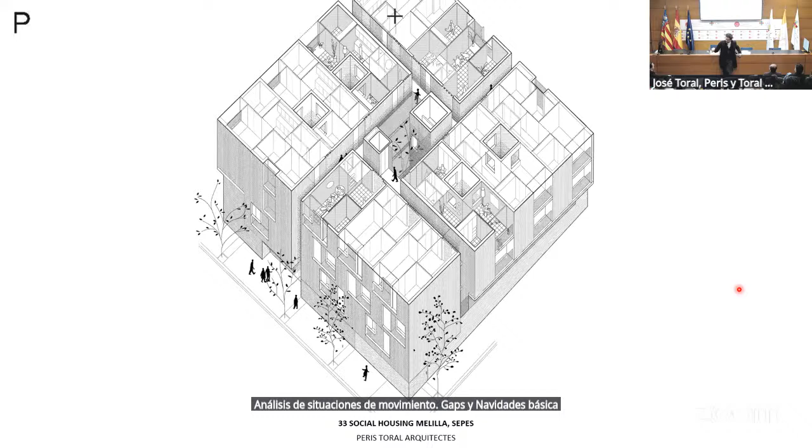This is one of the very old projects that we finished 10 years ago. It is in Melilla, so it's the first building we did with brick. Sorry. Well, this is the situation, the city of Melilla. And so we did this idea of the swastika. We're very worried about the movement of the air through here. So that's why all these gaps are entering. So we're talking about a patio that has gaps in every swastika system that allows the air to enter through it.

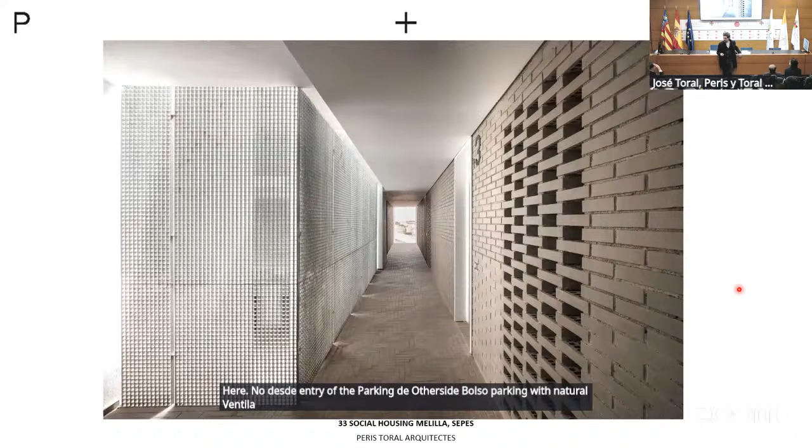And this is the entrance. So all the decisions are very, very volumetrical. So it's a volume that is shaping the entrances. So we enter through here. Now this is the entry of the parking on the other side. Also a parking with natural ventilation with these lattices, and using all the solar protection, everything thought through this idea of the movement of the air.

This typology that we are changing from 2 rooms to 1 room. So it's always the same system of equal rooms. This is the first project where we tried this idea of making equal spaces. No? This is what we're doing. In one story, in one floor, we have 2 bedrooms. Here we have 3 units of 1 bedroom.

And this is what happened in the facade that allows us also to change the scale of the facade. This is a facade where, you know, at this moment we never used very small pieces in front of the slabs. In this case, we raised it up with metal elements that were the ones holding all the facade.

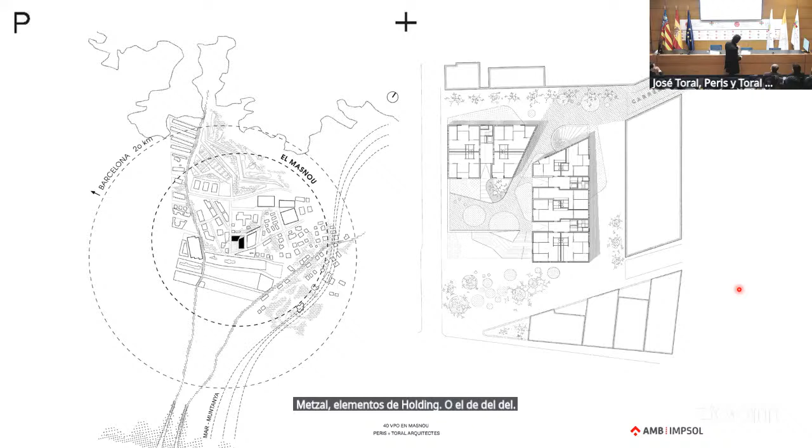This is the last project we have built. This is in Masnou. It's in Maresme. It's very much in relation to the sea and in relation to the mountain. So we have these dry rivers. And the first decision, we won the competition because we had this L shape. But instead of doing that, we divided it into 2 buildings, and we allowed a street to go through the building. So this Carrer Ciutat Real was not there. We give this continuity to this, no? So this is something that made us win the competition.

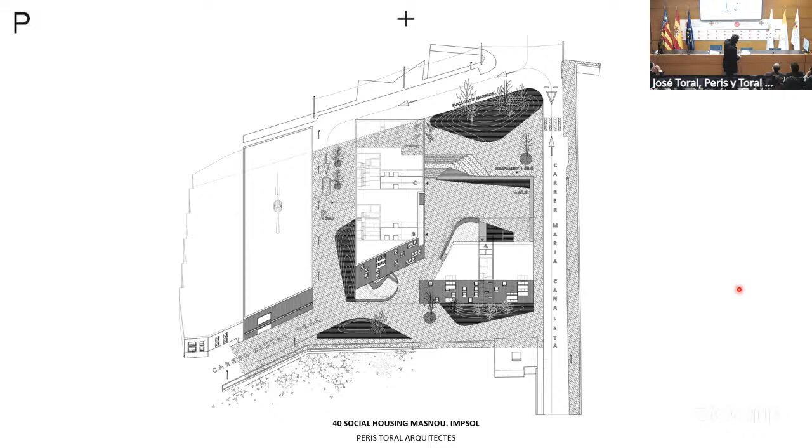And then this rooftop, since we have a facility in the ground floor, has become a public plaza, again, some public space where we're gonna have all the entries. And also we had the opportunity to do all the environmental, all the urbanización, the ground floor, the outer spaces. No? So we use the green spaces to give some privacy to the ground floor. So this is the continuity of the street, no?

Yeah, external works of landscaping. Well, this is this entrance, no? Again, this massive brick we are using, and how you enter. You have the entrances, and also on the other side you have the stairs. And we can give continuity to some parts of the city. So for us, it is always important that the project can also help the city, no?

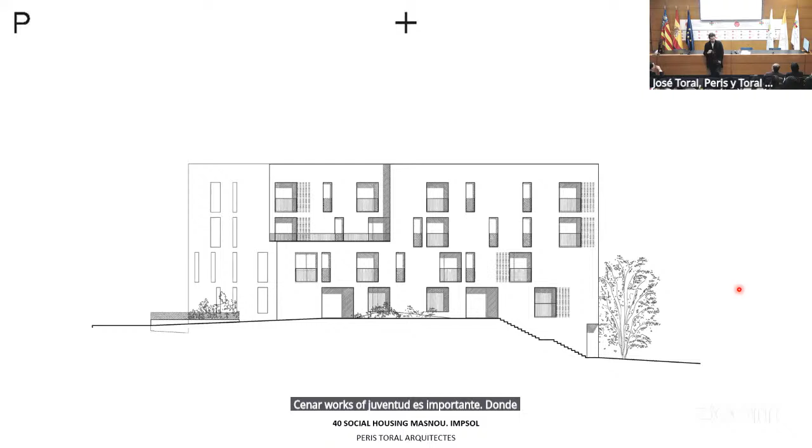And this is this plaza that has become space for entering, and this is from the city. But we have these stairs that are also a social place for the community. And one of the things here was the parking. We wanted to do the same. We have 40 units, but that means we needed to do natural ventilation in 2 basement stories.

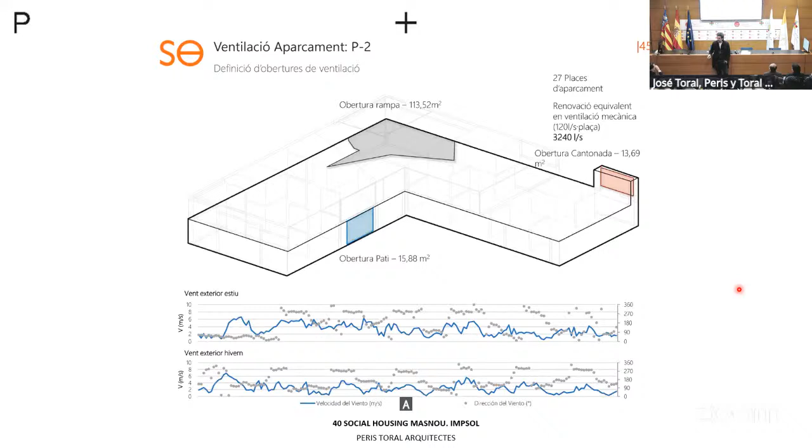So in order to convince the authorities that we can do that, we made some simulation of the movement of the air, and how strategically we have to put some openings to make this work. So it is nice that we have this big opening where we can even put trees in the parking. And this is the second basement. It is nice to see the amount of light that we can also have in this, and the resilience we were talking about before, how in the future we could rethink how to use these spaces.

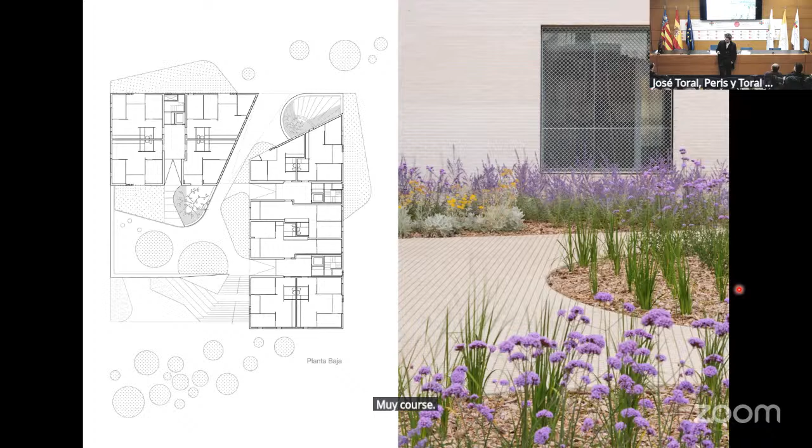Well, this is the ground floor with the entrances. So we have 4 units per plan, and 3 and 3, 6 in this block. So we have 3 cores, 1 of 4 and 2 of 3. This is this entrance space, with these wooden boxes in the ceiling that are also acoustic, to give more comfort. Trying to make all of them with good solar orientation, all of them with natural cross ventilation.

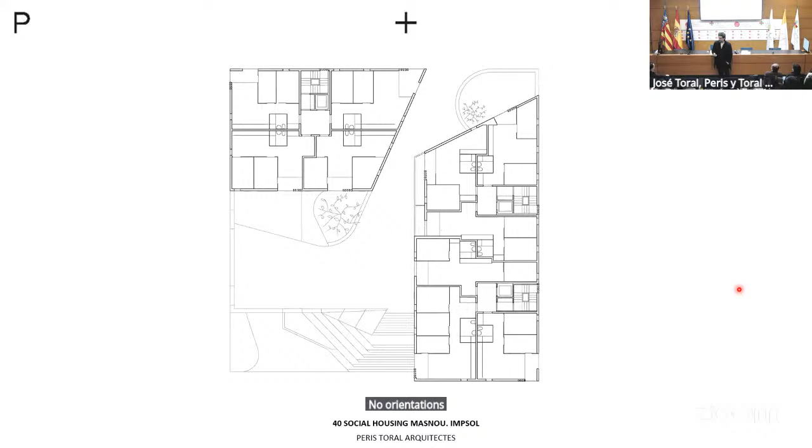This is the typical floor plan with this room where we enter. And this is the unit, very similar to the one of the block and tower, where we are using this situation of the day zone with cross ventilation. And we were analyzing how the wind is able to move from one to another. And also giving inertia: we leave the slab exposed, we put some inner walls made of brick, and also some openings. So this is the bathroom, and we make this window to let natural light into the bathroom.

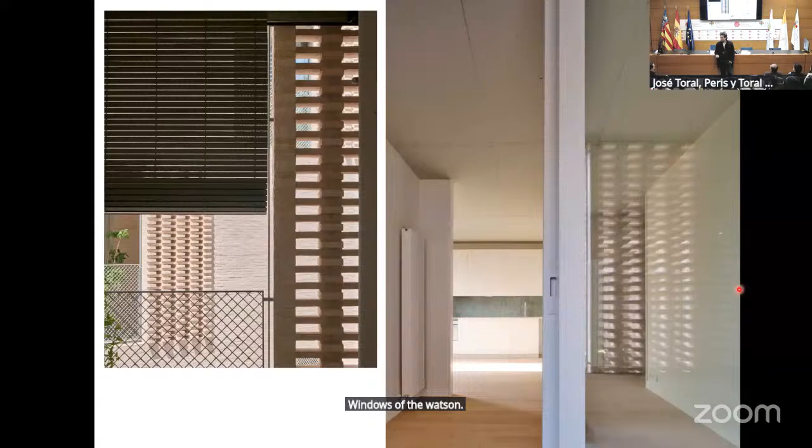So, if you have any questions, I'll be pleased to answer. Any questions around? Absolutely. Well, I have something to say, I'm impressed by the lecture. It's been a great lecture. But I prefer that some student starts.